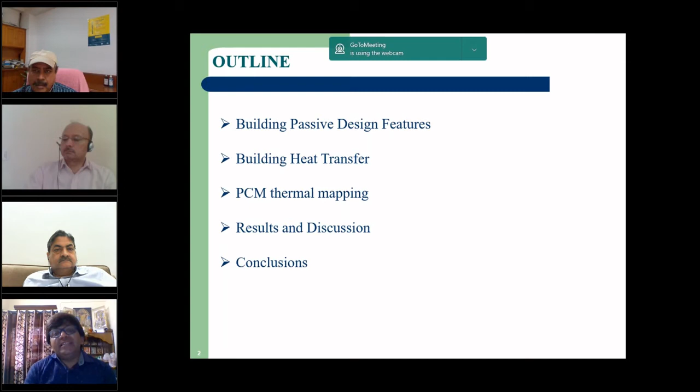So coming to this point, there is a concept known as utilization of phase change material in the building. This is actually one of the passive features. We know that in IIT Delhi there is a project on green cement. Similar to that, we can also look at how phase change material can be included inside building materials. Like in the concrete, when you are mixing the cement and the sand, if phase change material can be mixed with it, how it can be incorporated in the building.

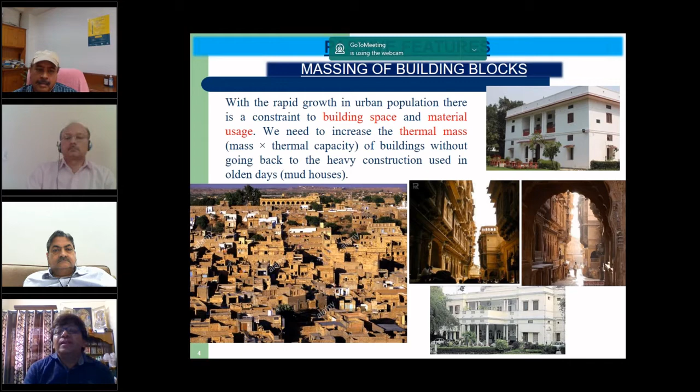Or if you are planning to have some sort of bricks which can macro encapsulate the phase change material, if we can cassette the phase change material inside the bricks, then how it can help us to maintain the thermal comfort within the room without actually utilizing air conditioning. So this is one of the research avenues in which my team is working.

But as I told you, phase change materials have been utilized for a long time, but in the perspective of the US or Canada, the Western countries, it was not for maintaining the building at a lower temperature. It was for maintaining the building at a higher temperature compared to the external environment. But in India, that same technology is actually to maintain the building at a lower temperature in contrast to what is outside. So there was a difference, and we tried to explore that difference, and then tried to find out the various potential phase change materials which can be utilized in the building.

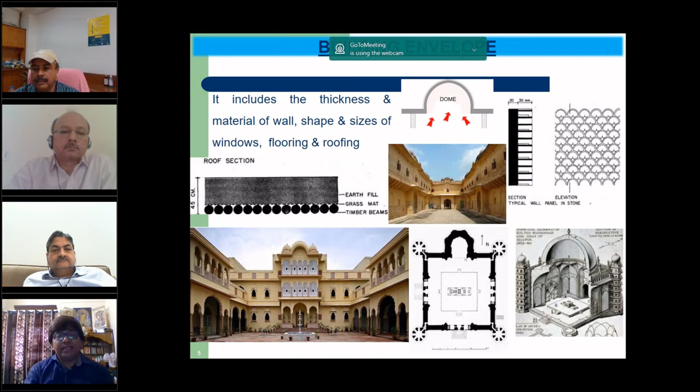So with that, I think all these slides I just want to skip. This is more on the technicalities, which I don't want to go into in detail.

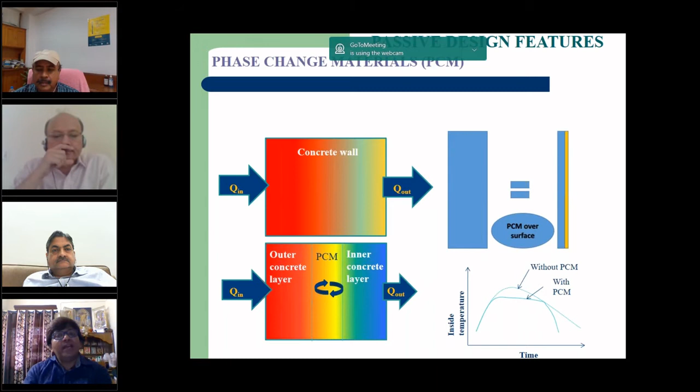Just we can say that a phase change material can help us to maintain the room at its comfort temperature if required, without actually having an active air conditioner running in that room. So you can see in this slide what are the various ways through which we can station the phase change material.

It can be stationed in the facade, like it can be there in the walls and the roofs, but there are challenges with it. And as I was telling, there was not proper research done on the utilization of phase change material from a tropical climatic conditions viewpoint. Like if you are attempting to use phase change material in the building walls of India, then there was no such research being done. So phase change materials may be commercially available, but which is the right phase change material? As we know, in India we have 6 climatic zones, 5 prominently, but each climatic zone is having its own salient feature.

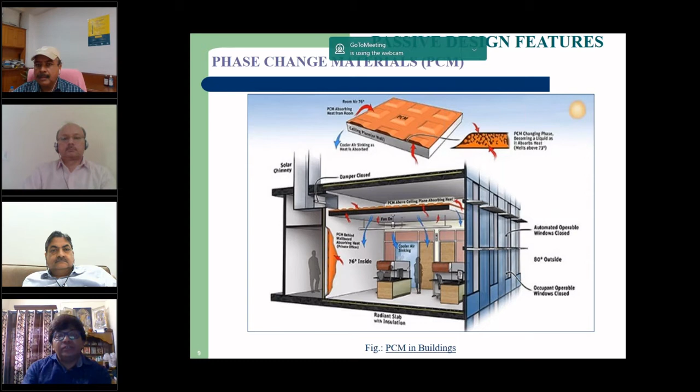So is one commercially available phase change material which is good for Delhi, will it be good for somewhere in Rajasthan, in Jodhpur? Is the phase change material which is good for Kanpur, will it be good for Siachen Glacier or Kargil? So that sort of material characterization or mapping of the phase change material against the requirement at a particular climatic zone was not there for Indian climatic conditions. So that was the first attempt with which we started.

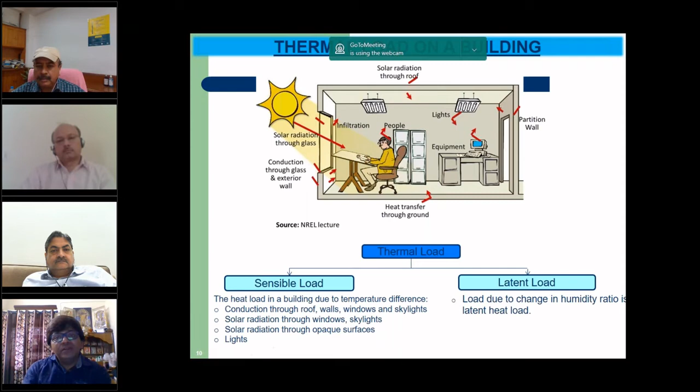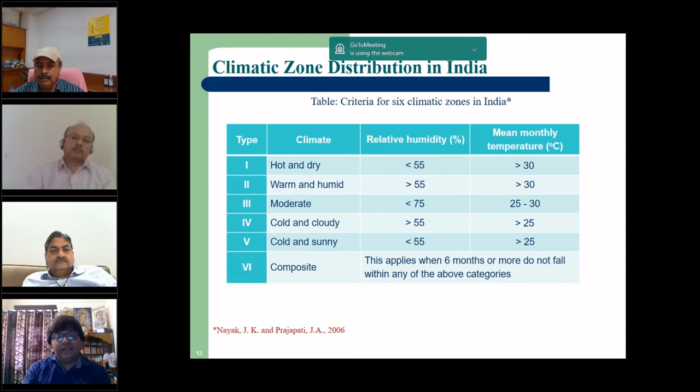So here I just want to say how these various building thermal loads are responsible to increase the temperature of the control volume or the room. So you can see there are various ways. I don't want to go into details about the sun geometry and all. So these are the various climatic conditions which we are having in India according to MNRE.

So the first thing which we did here is to map all the commercially available phase change materials with the requirement of a particular climatic zone. As I was telling, for Delhi it will be different. If you are going to Jodhpur or Jaipur, it will be different. So we took all sorts of phase change materials which are commercially available, even those which are getting developed at lab scale. We took all those, on the basis of their thermophysical properties; the most important thermophysical property of any phase change material is its heat storage capacity.

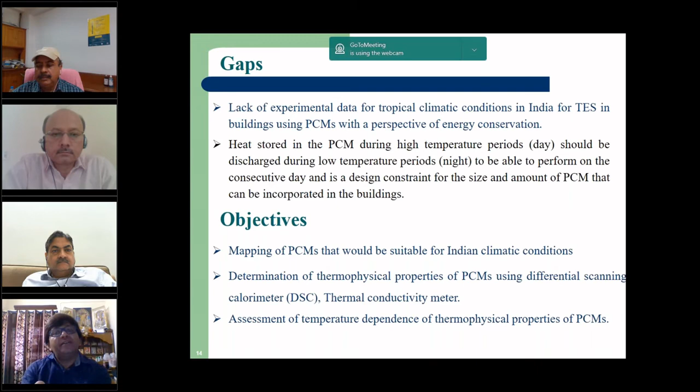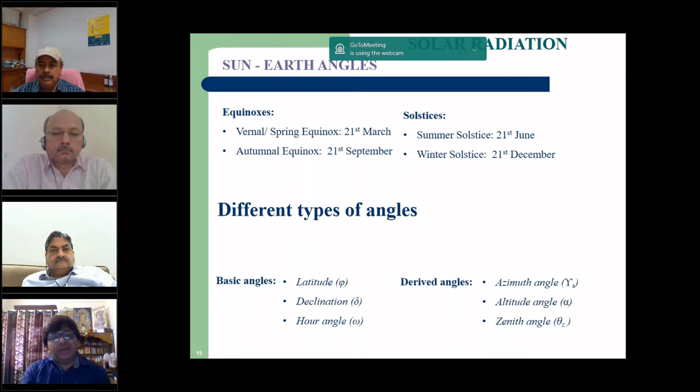So on the basis of its heat storage capacity and how it will be releasing the energy, that is thermal conductivity, we mapped all the phase change materials on the basis of the average temperature of the particular station where it is to be stationed. For that we required a bit of study of how the sun-earth angles vary when going from one station to another, and then we tested it for the 4 extreme cases, the 2 equinoxes and the 2 solstices, to find out for each phase change material which station will be prominent. So this we have named as mapping. I don't want to go into more details of it.

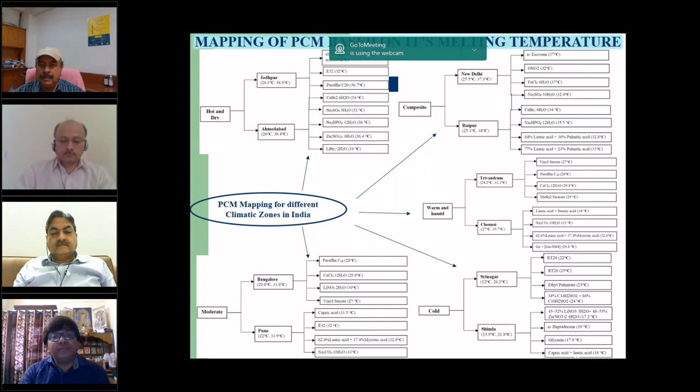This is all technical. This is an interesting slide which will show you how, for all the prominent climatic zones of India, the commercially available phase change materials are sieved out to the particular requirement of that station. This is just on the basis of the melting point, because that governs how the phase change material can store and release energy according to its suitability. After finding out which phase change materials are good for Delhi, we attempted to macro encapsulate those phase change materials.

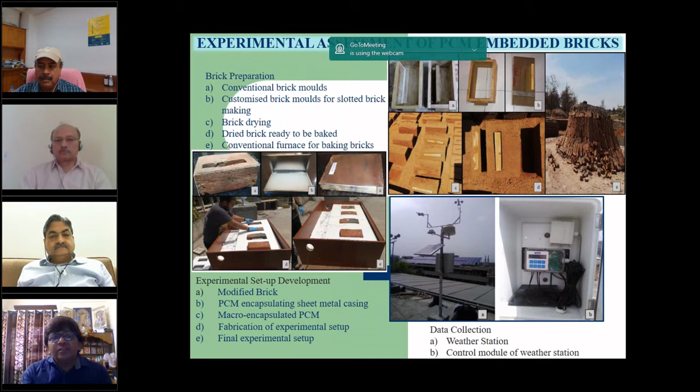We cassetted them in GI sheet boxes, slotted them inside the brick, and tested them in the extreme summer of Delhi for 2 consecutive summers, 2 consecutive years, to see whether it really makes any difference when we utilize this macro encapsulated phase change material in the bricks for Delhi summer. And there were a lot of interesting observations, that it makes a large temperature dip if we have this macro encapsulated phase change material in the bricks. And these are 2 phase change materials which we pinpointed for Delhi's climatic condition.

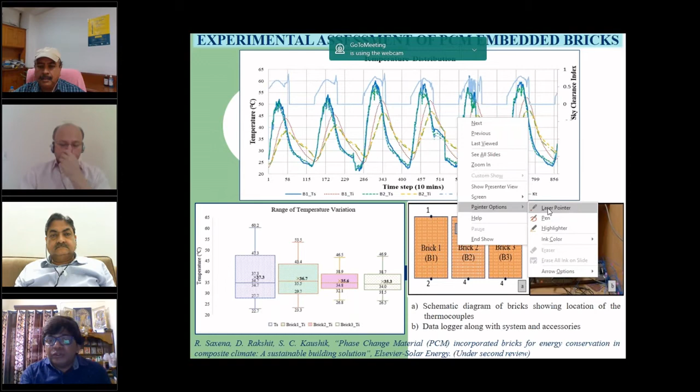These are the two, Eicosane and OM35. These are the broad conclusions. I will just take the bold one. The reduction in the temperature of around 10 degrees centigrade, it is the most extreme one which we have picked out in temperature fluctuation when we are having macro encapsulated phase change material in the bricks.

And then an inside temperature reduction from about 4.5 degrees centigrade to 7 degrees centigrade during the peak hours. And if you want to find out what sort of heat gain has been reduced, a maximum of 12% heat gain has been reduced with these two earmarked phase change materials, Eicosane and OM35.

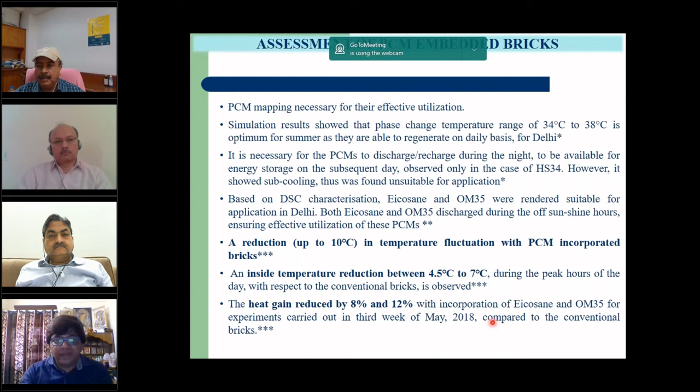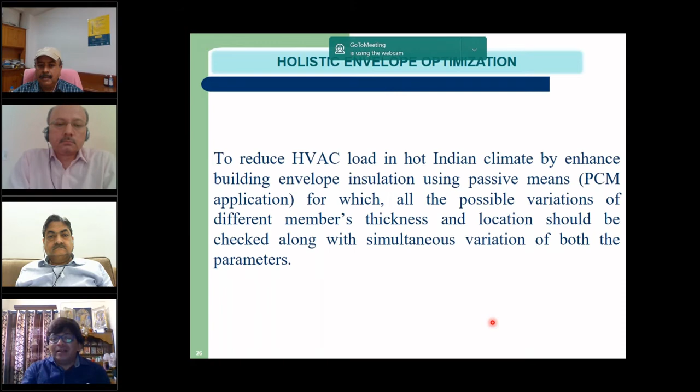So we have taken a layer of a phase change material, again for Delhi, because we are stationed in Delhi. We have taken a particular layer of phase change material and a layer of insulation which can be retrofitted on the facade, say on the roof and on the wall, and then we tried to find out what should be the location of those two layers, the phase change material as well as the insulation, and even the variability in the thickness.

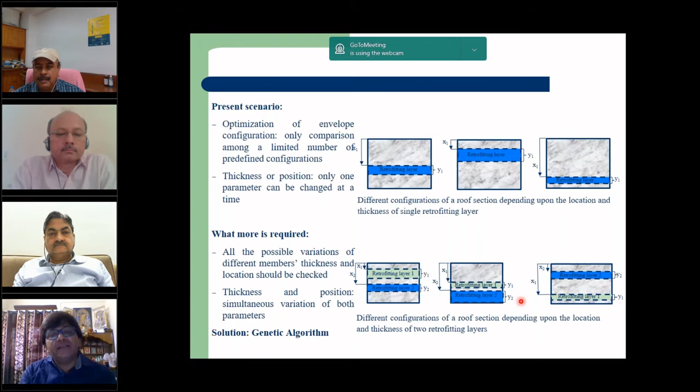If we are utilizing it in Delhi, what should be the thickness of these two, so that it will be directly impacting your electricity consumption during peak summer, because most of the time we speak about summers in Delhi. For that we have developed a GA code which is quite unique as compared to what is available on MATLAB and all other software.

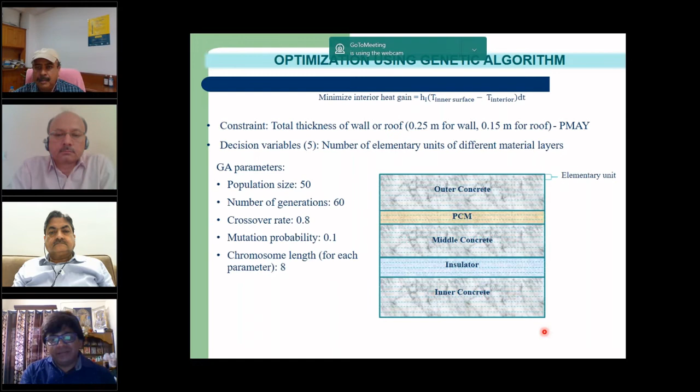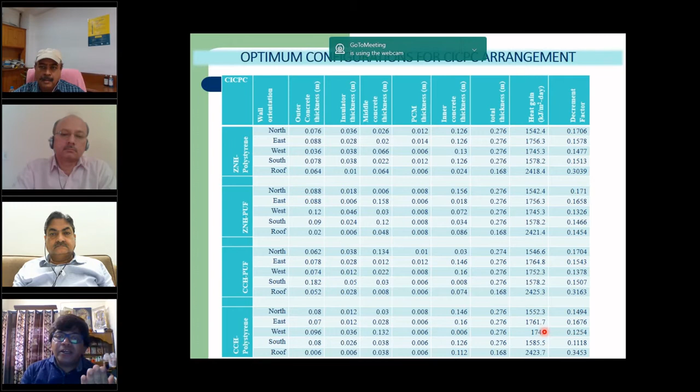So we have developed a GA code, and then we have taken all the commercially available phase change materials and the insulations which are generally market available, and then tried to find out, if we are putting them in the different directions of the walls and on the roof, how the electricity consumption can be reduced. So the best possible combination was polystyrene insulation with the phase change material. This is an inorganic hydrated salt, calcium chloride hexahydrate.

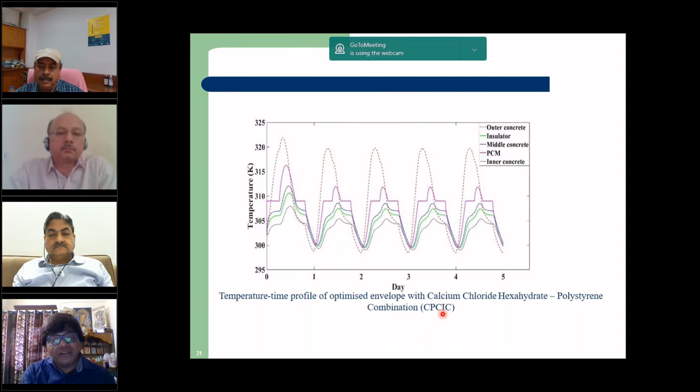So if we are using this in tandem, in combination, in Delhi's climatic condition, with the placement of concrete, phase change material, concrete, and then the insulation, that is the polystyrene, followed by concrete, we can have an electricity saving of around 8.8 kilowatt hour per day for the houses which are being developed for Pradhan Mantri Awas Yojana. We are still in the process of developing new houses through this PMAY, and if this type of incorporation of insulation and phase change materials is there for these new houses, then there can be a huge amount of electricity savings.

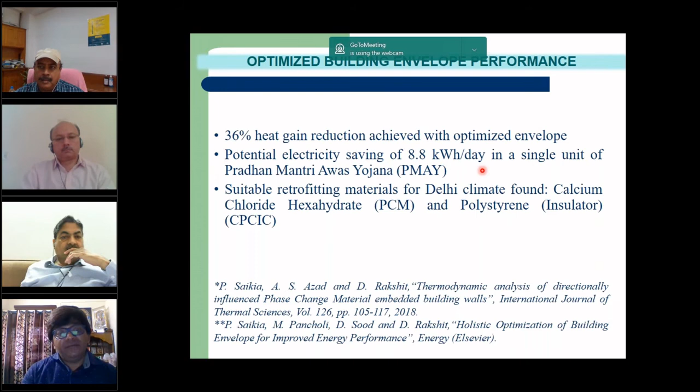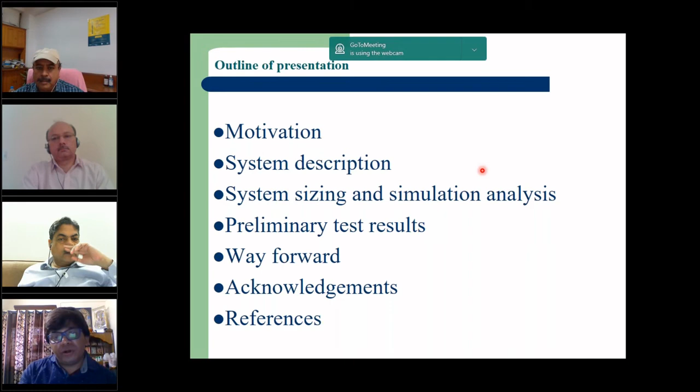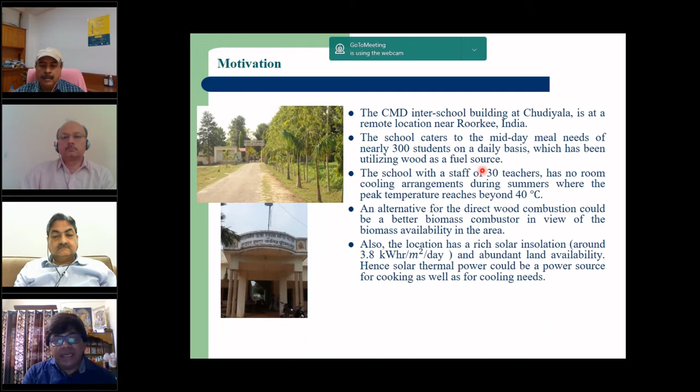The second thing I want to say is the active type of renewable integration which we have developed for a project, the India Trento project, ITPAR. For that we have taken a school in a remote village near Roorkee, and that school we have earmarked to utilize solar energy for cooking the midday meal, and at the same time we wanted to provide cooling for one of the staff rooms over there, and provide chilling for the potatoes and other perishables stored in a cold storage, and it is entirely grid free. We don't have any dependence on electricity.

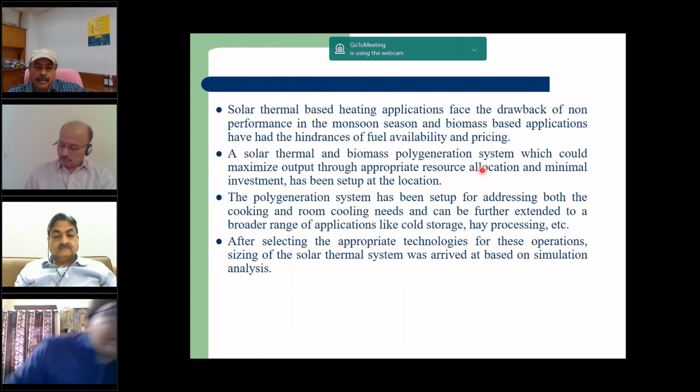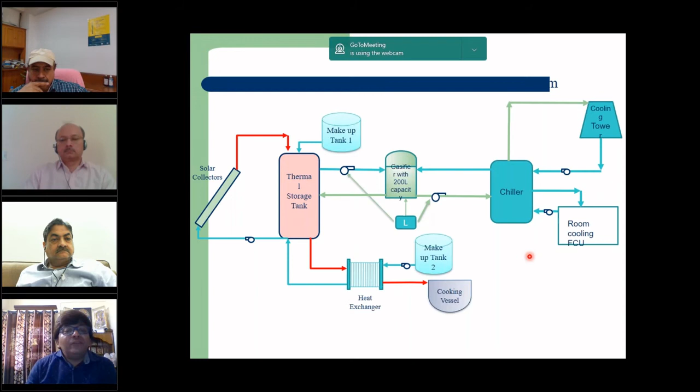And this is the first phase of the project. We have started with our second stage of the project through the Department of Science and Technology, GOI. In that we are attempting to utilize the chilling provided by the vapor adsorption technology, not only for cooling the room but also for storing perishables, and, if you can name some, vaccines which are to be stored for a long time without any sort of intervention from the grid. So this is a poly generation system which I wanted to exemplify.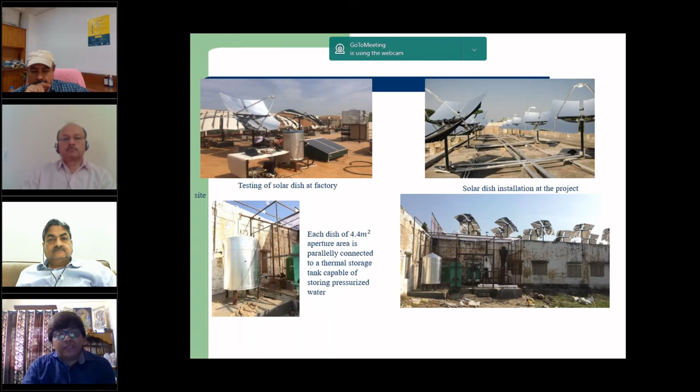So this is the vapor adsorption chiller system which is being installed in Roorkee, in the village school. These are the parabolic concentrators which we have utilized for generating the hot water and storing it in this thermal energy storage system. By utilizing hot water we are generating coolness, the air conditioning inside the room, and at the same time by utilizing hot water we are cooking the food for the midday meal. These are the pictures where we are cooking rice and rajma.

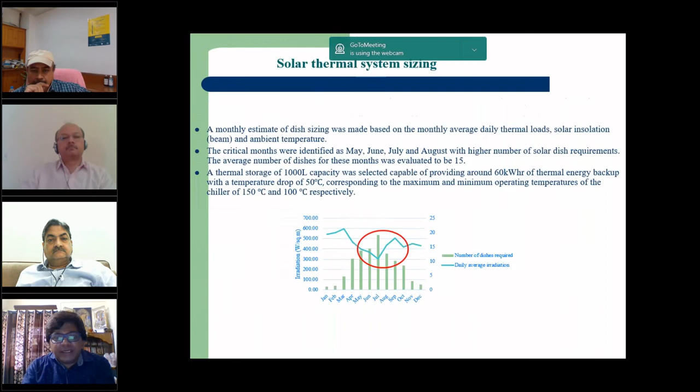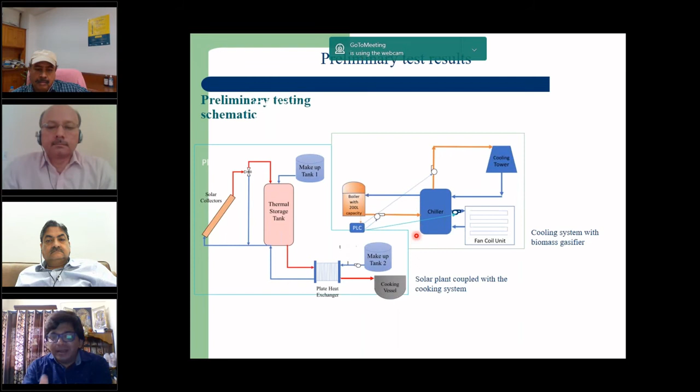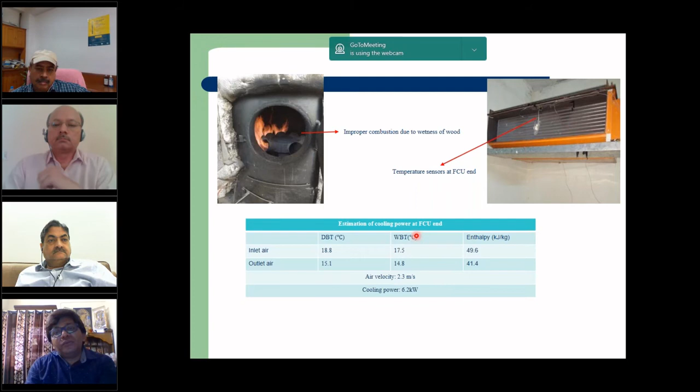These are more on the technical side. This is the second one where we are attempting to utilize this in tandem, not separately. In the first one we were utilizing it separately for cooking and for cooling, but now we attempted to make it a part of the same system. This is not renewable. This is for those days when we will not have solar. In that case, we can use wood or any sort of biomass which can be burnt to produce the hot water, which can again be utilized for cooling as well as for cooking food for the midday meal.

So I think I will end my presentation here, and if there are more questions regarding the integration of renewable systems into buildings, I will be happy to take them. Thank you.